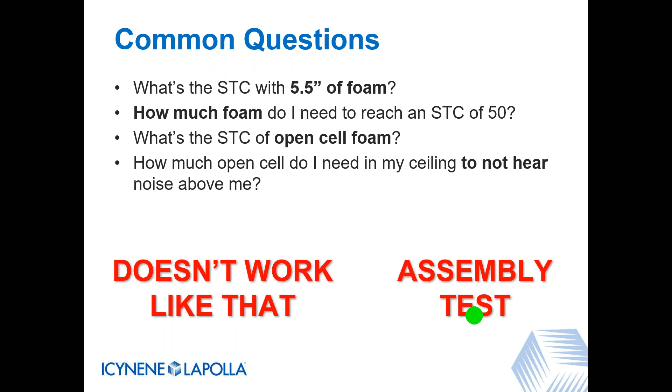It's not that easy. STC is an assembly test. This is important to remember. It is not a physical property that can be calculated and tested on just a material and then understand how it works in an application. You can get material values, but it has nothing to do with the end result of the application. So it's important that we all understand that STC is an assembly test and that it's not as simple as saying how much foam do I need to reach an STC of a certain value, or what's the STC if I have 5.5 inches of foam? It's just not that simple.

We're going to cover why that is and help us have a better understanding of how to have these conversations with people who may be asking you these questions.

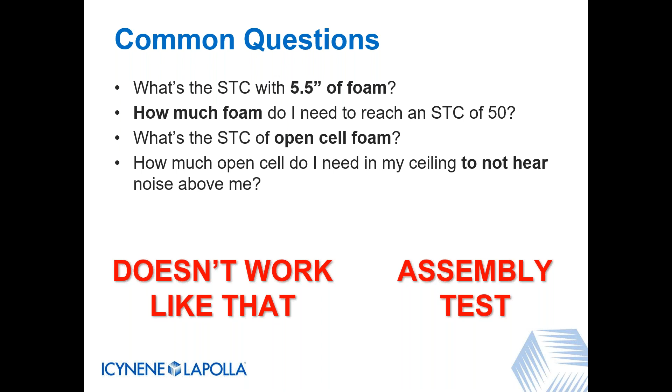So some of the originating factors that might be causing some of those questions are information that's put out there on different data sheets. These particular two clips from data sheets are Icynene Lapolla data sheets, but I think you'll see this exact same type of information on a whole bunch of different manufacturers' data sheets. And what it leads you to believe is that the sound transmission class of 41 is specific to the foam that is on this data sheet, or that the noise reduction coefficient of 0.7 is specific to the foam that's on this data sheet.

But the reality is that they're assembly related, and a lot of data sheets don't necessarily help explain what exactly that assembly is. And it's important to know that if you change a component of that assembly, then you're going to change the result. If an assembly was tested with 5/8 inch gypsum board and someone wants to build with interior 1/2 inch gypsum board, then you will get a different result.

So it's important to know and how to explain to someone that it's not a material-based STC result, that this was achieved with this foam in an assembly, not just the foam is causing the STC. This particular data sheet here attempts to at least show that there is a 2x4 wood stud wall involved in the assembly, but it doesn't tell all the details. It doesn't tell what sheathing was used and how much foam was used. It just simply says STC 37.

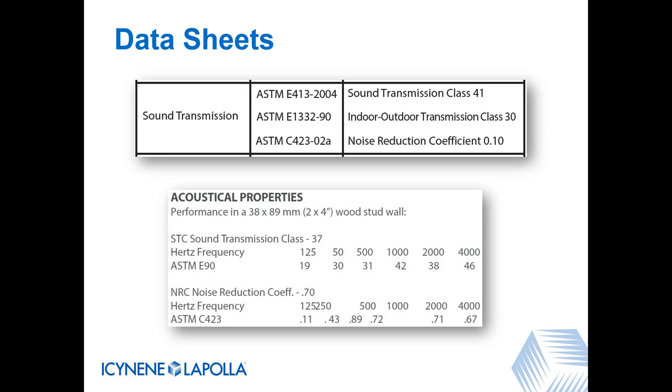So understanding that we do have information, but it's really too difficult to list all of the information. Every detail of every assembly is too difficult to list on a data sheet. So we want to inform people that we do have something, but we just can't list everything on a data sheet. It gets too complicated.

Let's make sure we understand a little bit about how the STC testing works. So STC, Sound Transmission Class, that's what it stands for. You may see a listing that says an STC of 37 class. Sometimes they repeat the word class. It simply is just referring to STC.

It's an integer rating of how well an assembly attenuates airborne sound. An assembly, you need to make sure you remember that. This is important. An STC of 35 does not mean it stops 35 decibels of sound. So in this example here, we've got a room that's creating 100 decibels of sound, and on the other side of the wall, we're hearing 55 decibels. That does not mean that this wall has an STC of 45. That's not what that means. So STC is not directly related to how much decibel sound is lessened, so make sure that's clear as well.

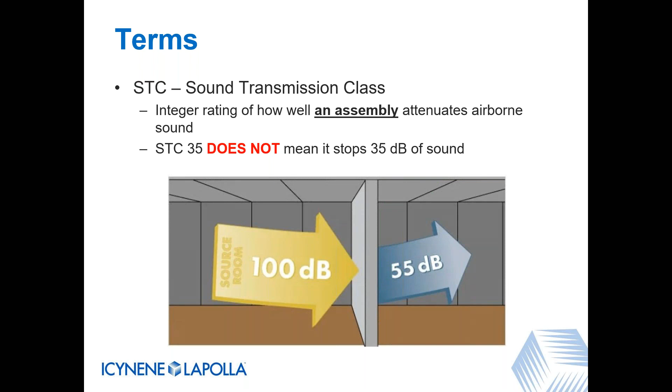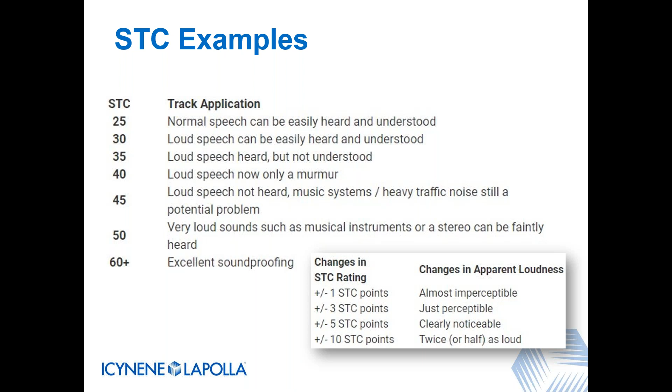So the difference between 40 and 50 is a big difference in STC. But if you have a rating that requires a jurisdiction's 45, and you have an assembly that has a 43, that's only 2 STC points difference—between imperceptible and barely perceptible. So that's something we need to be able to argue when talking to people, to understand that a 1 to 3 point difference is really not making much difference in the overall sound of that assembly. It's important we remember that so we can communicate it moving forward.

Problems with STC testing—there are quite a few. Let's start with the one that benefits spray foam competitors the most. STC testing requires a laboratory airtight assembly. Remember that image I showed of the two rooms? This wall, this assembly that gets put in between the two rooms, has to be airtight because sound travels through air.

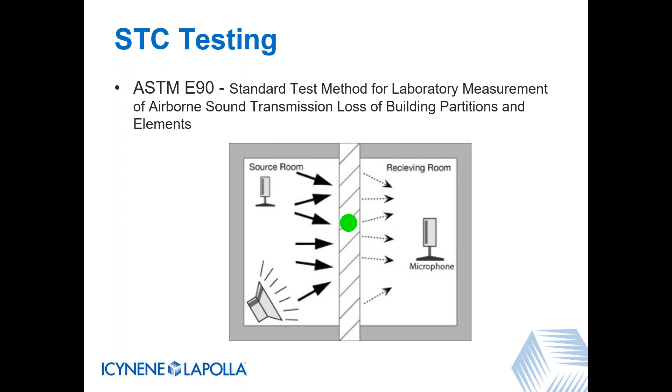If you do not have an airtight assembly, sound might bypass your assembly and get into the microphones, so you're not really testing the actual assembly itself. In a laboratory test condition, you've got a wall filled with air permeable fiberglass and sheetrock on each side, but there are no penetrations—no windows, no power outlets, no light switches, no pictures hanging. Unlike a real world scenario, you're testing a perfect wall that isn't related to the real world, where penetrations allow air to move through. So a fiberglass assembly tested in a laboratory gets the benefit of being airtight, whereas in the real world it's not. These tests are not real-world related.

Spray foam, on the other hand, is an air barrier material. So when you test an STC assembly with spray foam, whether real world or in a laboratory, you're already getting the benefit of the airtight assembly.

STC also is not a good representation of low frequencies. STC testing is from 125 hertz to 4,000 hertz. Any audiophiles out there will know that bass is less than 125 hertz. So a lot of bass in music, deep voices, will carry through an STC wall assembly much differently than higher frequencies would. So STC results are not accounting for bass.

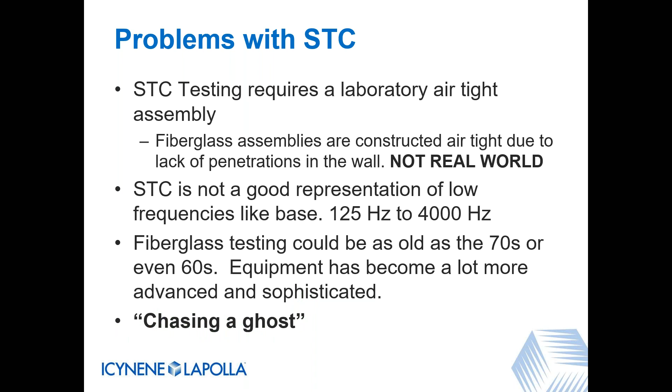Another issue with STC testing is that it was invented in the 60s, so some testing out there, some assemblies, could be as old as the 60s or 70s. Of course, equipment has become a lot more advanced and sophisticated since then, so results, if those assemblies were tested again, might not be the same. So we have to ask ourselves, are we chasing a ghost here—trying to achieve with modern materials and newer equipment results that fiberglass got the benefit of airtight materials for, from tests that could be 30 or more years old? Are we chasing a ghost trying to achieve results that really don't work in today's world? We have to keep that in mind.

So with all those issues, what is it that we should communicate?

So using 5/8" gypsum board instead of 1/2" gypsum board is a good example of this. Using a heavier gypsum board rather than your standard 1/2" gypsum board is a way to help achieve better sound attenuation. If sound attenuation is important to your job, it's worthwhile explaining that. Hey, on your exterior walls, instead of using 1/2" gypsum, use 5/8. You're automatically going to increase sound attenuation. What else can you do to increase sound attenuation?

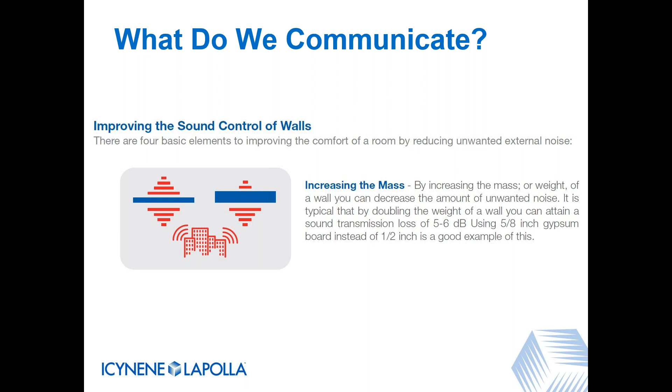You can decouple the system. So here we've got a wall that is all touching itself. You've got wood studs, you've got insulation, you've got interior and exterior sheathing, it's all touching. The sound can vibrate right through those materials and go right through.

Decoupling, this wall has an airspace inside. You've got some insulation on one side, spray foam adhered to this wall, and then you have airspace before the sheathing of the other side of the wall. That airspace decouples the vibration movement. The vibrations move through the insulation, they hit airspace, vibrate in the air, and then not as much sound transfers through. Sound is energy. When this impacts on a wall, it sets the wall into vibration.

This vibration carries the unwanted sound through to the opposite side. So another way, rather than having airspace inside the wall, is to change the way that the sheathing is fastened in this wall assembly. If the interior sheathing is fastened with resilient channels or furring strips, that is another way to decouple the surface area contact with the studs.

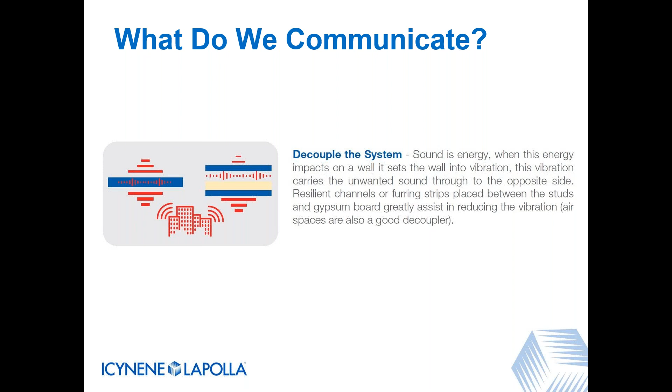Again, if you have our first example with increasing gypsum from 1/2" to 5/8", and a second example of using an airspace in the assembly or a resilient channel or furring strips, you've already dramatically increased the STC of this wall just by doing that all by itself, those 2 things.

A third thing is using an absorptive material. So here we have an assembly with open cell spray foam inside, which absorbs the sound energy and doesn't allow very much of it to transfer through. So as you can see, you've got noise on the outside of the wall. As it's moving through the absorptive materials, you've got less on the inside wall.

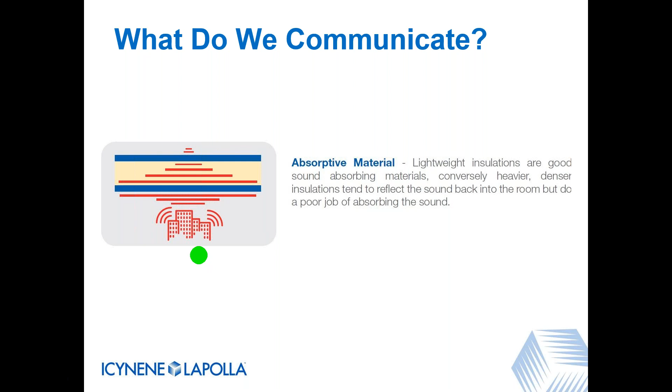So lightweight insulations are good sound absorbing materials, and conversely, heavier, denser insulations tend to reflect the sound back. So lightweight can be considered open cell, heavier, denser can be considered closed cell. So closed cell would help reflect this outside noise back to the outside, while open cell absorbs it and prevents it from moving through.

Fourth way is air sealing the wall. Like I mentioned earlier, sound moves through air. If we can air seal an assembly, like using spray foam, then we can prevent sound from moving through the wall. In real world, fiberglass batt insulations, even cellulose blown-in insulations, will settle over time, and there will be airspace, air pockets that allow sound to move through. You can see that while fiberglass does reduce the sound, an air barrier system would reduce it even more.

So something we need to be pointing out, of course, we are advocating for spray foam. Therefore, we want a nice air-sealed wall for many reasons, sound being one of them.

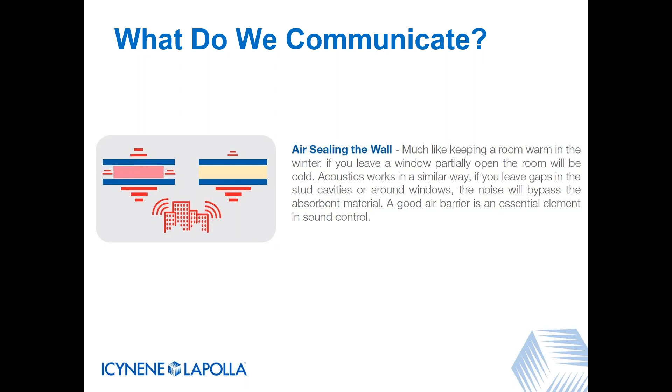Again, in this document, it also points out that in the real world, walls are far from perfect. Walls can have numerous acoustical flaws in them. Items such as electrical wiring, switch boxes, outlets, piping, all make sound control more difficult. Beyond providing a sound absorption material, Icynene Lapolla open cell spray foams fill a wall in ways that fibrous batts cannot, adhering to the substrate, wall framing and sheathing, limiting the ability of sound to bypass the insulation.

Noise, like water and temperature, will move through gaps. Icynene Lapolla open cell spray foam works as an air sealing element as well as an acoustical insulation, limiting the effect of real world acoustical flaws. So again, this paragraph is kind of encompassing everything that we've just talked about: the issues with STC testing, the fact that fiberglass is getting a benefit of the test method, and the fact that real world has many, many variables involved.

So final summary here of what do we communicate: open cell foam shows similar, if not better, performance than fiberglass.

Icynene Lapolla open cell foams vary in density, so there could be 3/4 pound to 1/2 pound, but we find that they have very similar performance. The 3/4 pound foam that we're getting ready to show you was tested at 2 inches, because that is an air barrier at a minimum 2 inches. So if you're using foam for air purposes, for sound purposes, the 3/4 pound product can be used at a minimum of 2 inches to achieve that sound air barrier result.

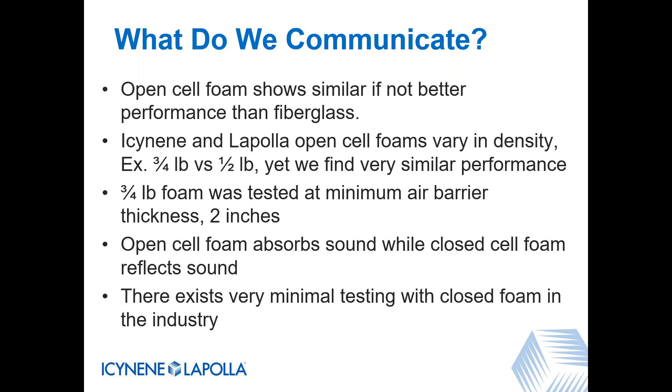Remember, STC is assembly based, so if you were to change something in these assemblies, you would get a different result.

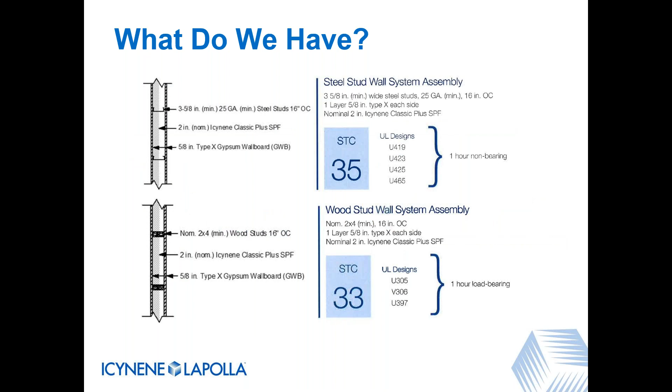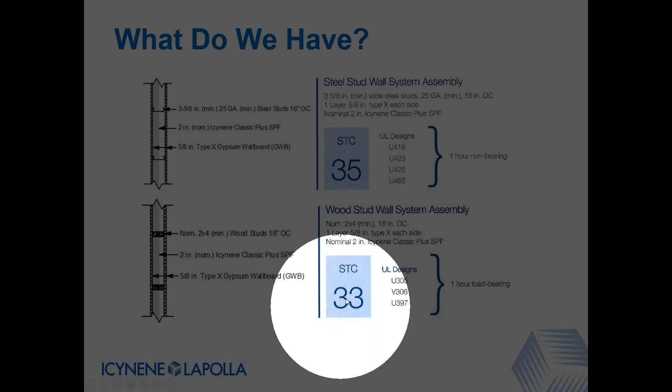Case in point, here is an assembly with steel stud with 1 layer of gyp on each side, and wood stud with 1 layer of gyp on each side. Each of these are using the 3/4 pound foam at only 2 inches. So if this is an interior partition wall trying to achieve a certain STC, you can get a 35 here and a 33 here - wood stud 33, steel stud 35 - with only 2 inches of that 3/4 pound foam. Just an example of some of the testing we have.

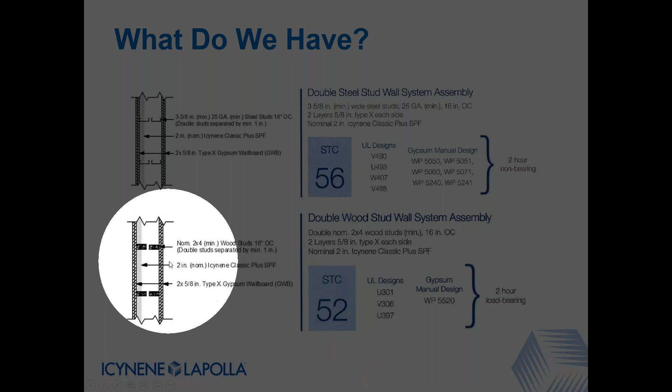Same thing with the wood stud, decoupled with 2 different sets of studs, gives 52, again with only 2 inches of that 3/4 pound product. So just several examples of what the testing we've done with STC.

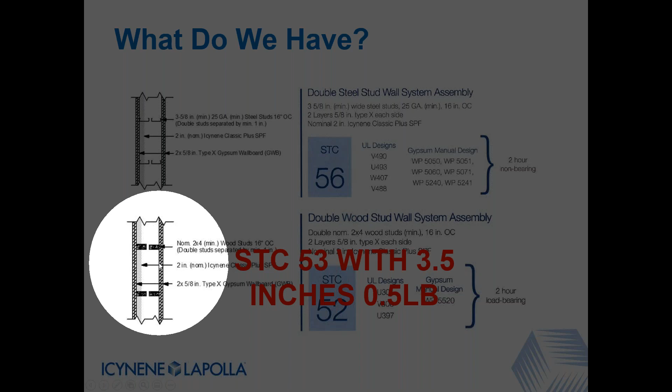We wanted to point out that we actually did a second test on this wood stud assembly where we used 1/2 pound foam at 3.5 inches, and we're able to achieve a 53 - slightly better than the 2 inches of foam. We used a normal 1/2 pound foam, 3.5 inches of foam, and got a 53. Just another example of some of the testing we have.

One thing we want to point out as we finish the STC section is that engineering evaluations are currently not available. Our company can't provide them, and similarly we have not been able to find third-party acoustical engineers willing to provide an evaluation for STC assemblies. This simply points to the fact that STC can change dramatically depending on what's in the assembly. So it's impossible to expect any manufacturer to have a test for every single assembly out there.

That's why it's important to know the different ways that STC in the real world can be affected: increasing the mass, decoupling the system, using absorptive materials, and having an airtight assembly. All four of those things we need to have on the forefront of our mind when we're discussing STC with anyone out in the field.

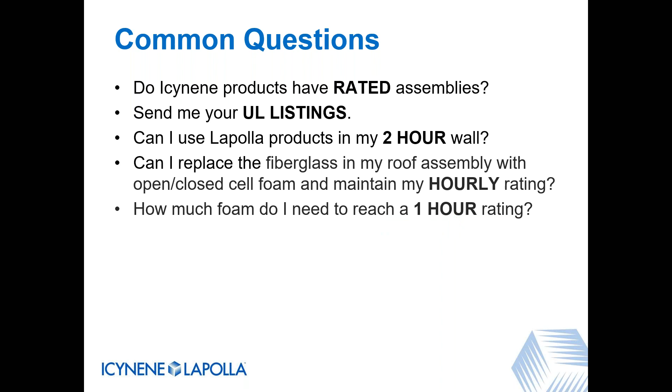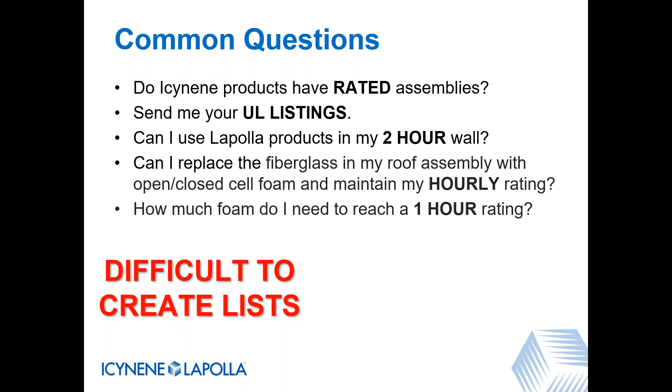This one's more common than I'm happy to see, because it's unfortunate. Similarly to the questions related to STC, it's difficult to create lists. A lot of people just want a list of all of our UL listings, but it's very difficult to come up with that list, and we'll talk about why that is.

It's important to know that foam is along for the ride, particularly related to this last question. Spray foam insulation, in fact foam plastic insulation in general—rigid board foam, XPS, EPS, polyisos, and spray polyurethane foams, open or closed cell—do not create hour ratings. They do not create time ratings. They are combustible. They are along for the ride.

All those products are relying on other materials to create the hour rating. It's important that we can convey that simple message, because someone may be thinking, hey, I need an hour rating in my ceiling, how much closed cell foam do I need to create an hour rating? We need to stop them right there and say, look, no spray foam product, no foam plastic insulation product is going to create your time-rated assembly. You have to rely on other materials for that.

Same thing with UL listings, we'll get to that in a second. But just like we did with STC, let's look at what we see on the data sheets that might help us understand a source for these questions. We state in multiple manufacturer data sheets, not just Icynene and Lapolla—our industry states that there is compliance with 1 and 2 hour ratings.

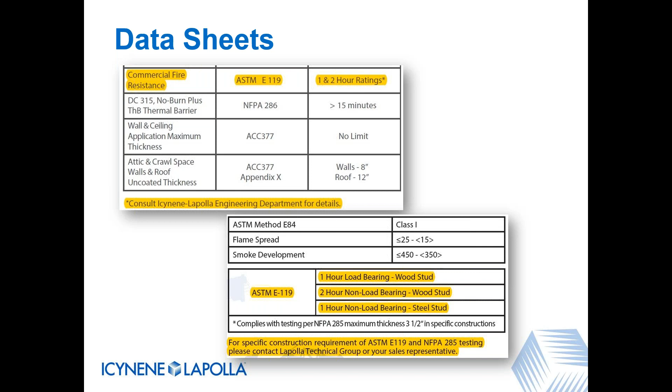We state that we've got 1 hour wood stud assemblies and 1 hour steel stud assemblies. But in both of these data sheets, you will note that we say consult the engineering department, consult the technical group. That's because it's just not as simple as saying, yes, we have it. It's an assembly-based test, just like STC, and it depends on the assembly, and it depends on the product and where the product's going and how much we're using.

So knowing that, before we get into what we have, let's make sure we understand what these hour-rated assemblies are. It's ASTM E119. That's the very common term for time-rated, hour-rated assemblies. The standard test method for fire tests of building construction and materials. It's an assembly test—we got to remember that.

And here's what it applies to: there's a floor ceiling test or assembly, there's a roof ceiling assembly, you can actually have time-rated assemblies related to beams and columns, and then you can have walls and partitions. Walls is intended to mean exterior walls, partitions is intended to mean interior walls. So all of these different assemblies can be time-rated for 1, 2, 3, 4 hours, whatever the particular application requires.

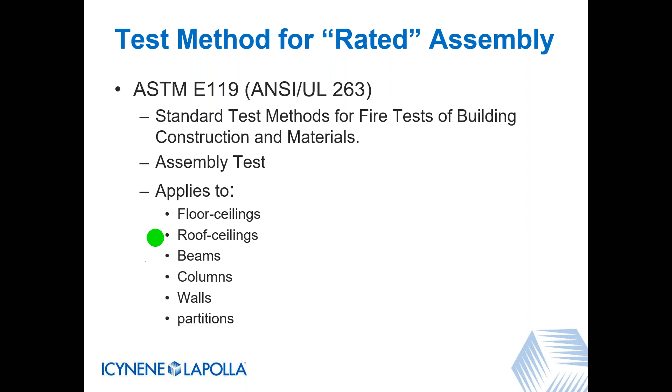So we need to make sure when we're talking with someone that we understand what assembly are you even referring to when you ask us if we have any time-rated assemblies. Which type are you referring to? We need to make sure we know—we need to ask that question.

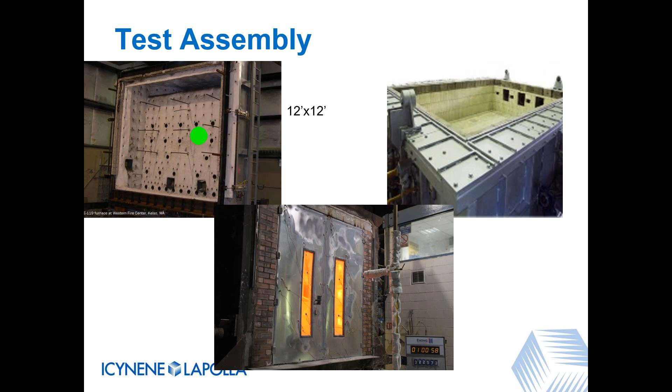How the testing works: there is a permanent structure like this or like this. This one's for walls, this one's for ceiling, roof type applications. This one's horizontal, this one's vertical. There are thermocouples inside. Fire is produced at these different locations, at the squares, just like these squares. Your assembly is built and then pushed up to this wall or laid down on top of this horizontal assembly, and then the fire occurs. That's how the test occurs, that's how it's actually tested. You have a permanent structure, the fire is created inside, and your assembly is pushed up to it.

Now, during that fire, it's a temperature curve that is created in that assembly. If you have an hour-rated assembly, you're going to go up this temperature curve for an hour. So between 30 and 60 minutes, you're going from 1550 degrees to 1700 degrees. That gets pretty dang hot.

A couple interesting points. It's not just the fire and the assembly maintaining its composure during that fire. The unexposed side has to remain below 250 degrees Fahrenheit. And once the time rating is up, there's actually a second portion of the test where the assembly undergoes a fire hose water spray.

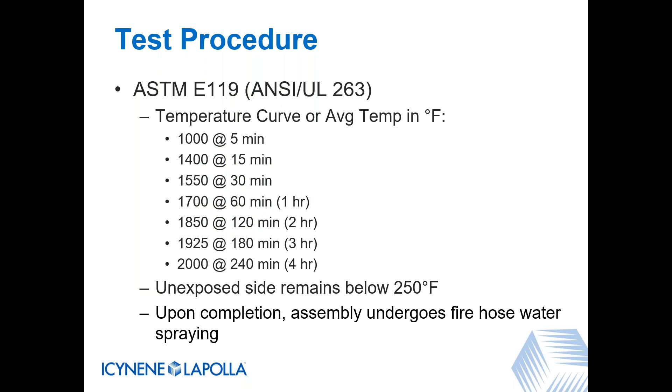It has to remain in place during that fire hose water spray. So the whole point of this is to let you know that sometimes it may be thought of, hey, you don't have a particular assembly, why don't you just go do the test real quick? There's a lot that goes into these tests. The fact that the other side has to remain below 250, and you still have the hose spray beyond this extreme heat. There's a lot that goes into them. So it's important to know that it's not a simple test.

One thing that I want to make sure to point out, metal transmits heat. So when you have metal on the fire side of an assembly, that's going to transmit heat right through. A lot of times I get asked the question,

for example, metal buildings. Those cheaply constructed metal buildings, they might be close to another structure and they might need a time-rated wall. We're not aware of metal assemblies that are meeting these requirements without a bunch of non-combustible materials inside of that assembly. So remember, spray foam is not non-combustible. Spray foam is combustible. So if you've got an assembly that's using a lot of metal sheeting on either side, it's probably going to be very difficult for spray foam to be inside of that assembly and maintain an hour rating. So just want to point that out there.

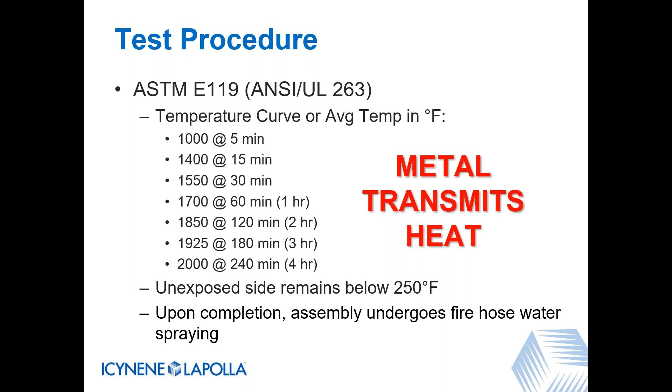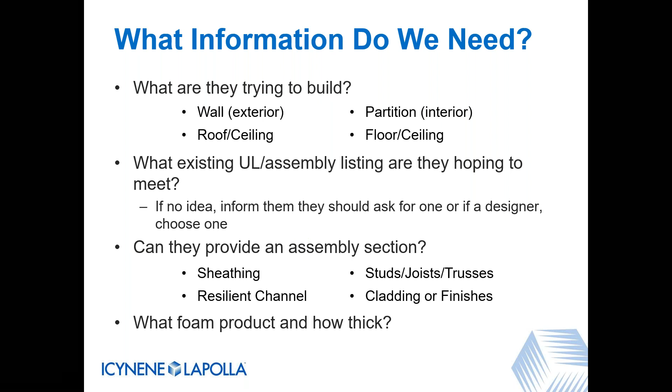And of course, this is a huge headache when people don't even tell us what foam product they want to use. It's extremely important. We got to know, we're selling foam here, we're advocating for foam. Which foam are we wanting to use in this assembly? Let's make sure we, at a minimum, identify that. But the rest of this is important. If we can know this information, then we can have a much easier time determining if our spray foam can be inside of that assembly.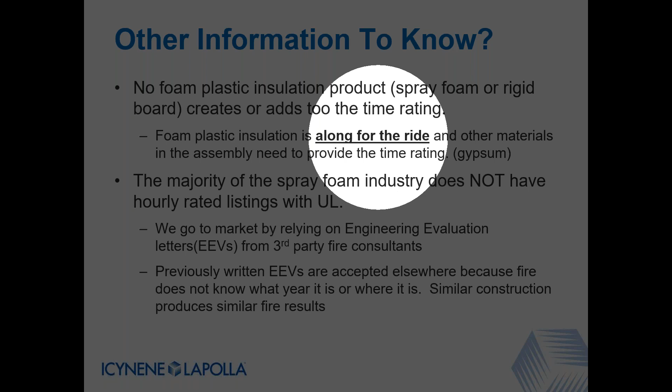Just some other information to know - I've mentioned this before, but I'll repeat it. No foam plastic insulation product, whether spray foam or rigid board, creates or adds to the time rating. It's along for the ride. It's important to know, and we need to communicate to people that the other materials in the wall need to create the rating.

We also need to know that the majority of the spray foam industry does not have hourly rated listings with UL - the vast majority. There are only very few UL listings that even include spray foam. The entire spray foam industry goes to market relying on engineering evaluation letters, otherwise known as EEVs, from third-party fire consultants, most commonly Priest & Associates or Hughes & Associates.

So we rely on third-party evaluation letters. We take those UL listings that they're trying to meet, and the fire consultants determine if we can put the spray foam in that assembly without detracting from the existing rating, because the existing design is intended to create the rating. Maybe they had fiberglass batts in the original UL listing design, and these third-party fire consultants will determine if you can put spray foam in there and maintain the rating.

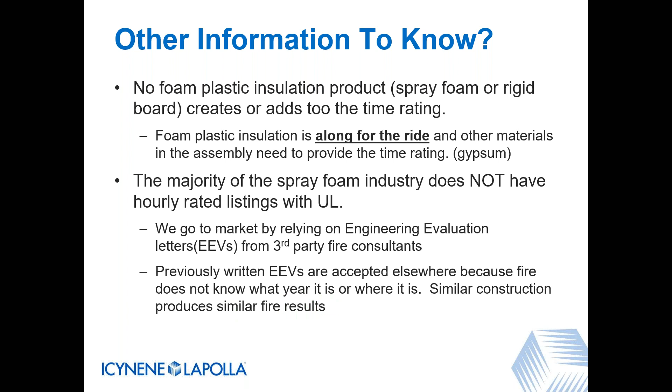It's also important to know that previously written EEVs are accepted elsewhere, because fire does not know what year it is or where it is. It doesn't know if it's residential or commercial construction, or if it's 2000 or 2020. If the assembly is built the same, the judgment remains - same products, same assembly, same judgment. So previously written EEVs are accepted by building officials all over the country. Similar construction produces similar results, so we don't have to get a brand new evaluation for every instance.

From engineering evaluation letters, as an example, Icynene and Lapolla have approvals for a very common wood frame assembly. This is just some of the approvals we have - we have a bunch of them. I'll just go over several that are very popular, starting with the U356 wood frame construction.

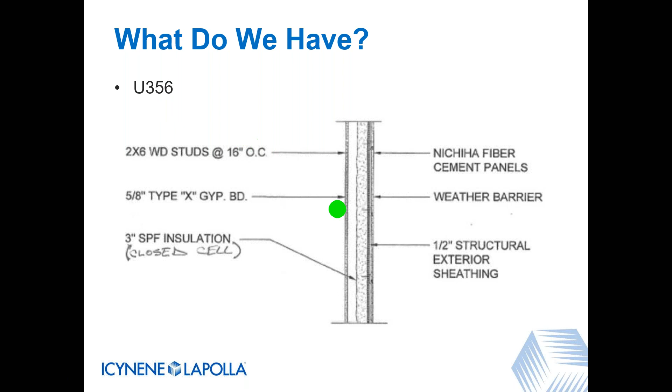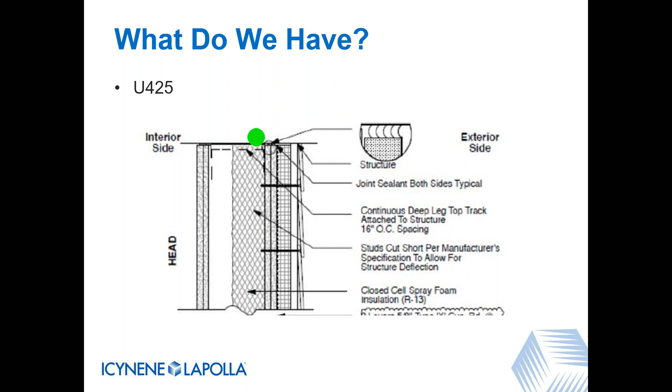We've also got the U425 steel stud construction, which looks like this with multiple layers of gypsum. This is a 2-hour rated wall, and it even uses exterior insulation on the outside.

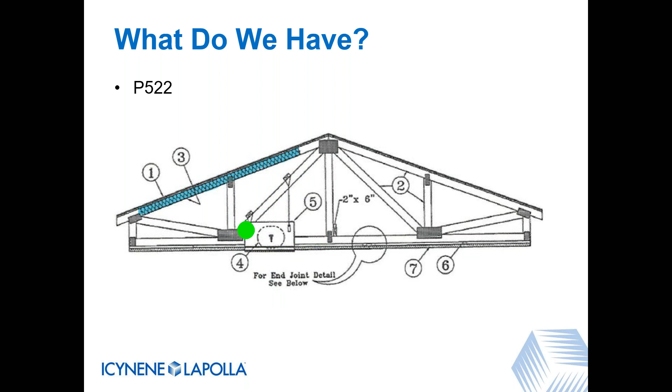Another popular one is the P522. This is very popular in commercial construction made out of wood frame, like apartment complexes, assisted living centers, and nursing homes. This is a very popular one where we can put the insulation underneath the roof deck, create an unvented attic, and maintain the hour-rated roof ceiling application. So this one's very popular.

We've also led the way, the industry - Icynene and Lapolla has - in doing testing for a shaft wall. For those not familiar, a shaft wall is a kind of area separation wall made with two layers of 1-inch thick gypsum in the middle. This is most commonly used in townhomes or condos to separate one unit from the other.

Now, what's unique about this is that this testing has given us many different approvals for many different UL listings. However, we are not listed in UL - so we have the engineering evaluation that shows that all of these listings are now approved.

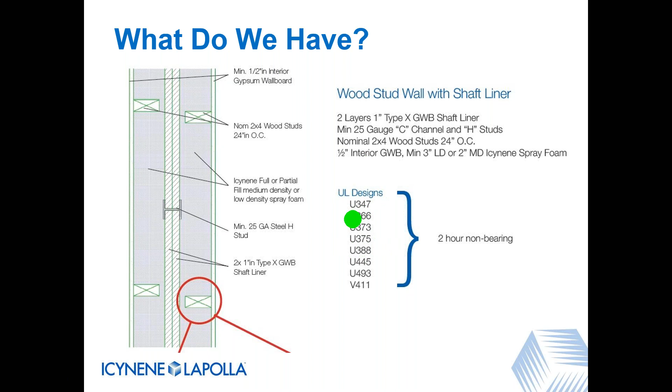What's unique about this assembly - let me make sure I make this clear - is that this circle down here is exploded into two different sections. We're looking at a fiberglass version here and a spray foam version here. The difference is the requirement for this assembly: the fiberglass requires a 3/4 inch airspace, it does not touch the shaft liner, but our testing allows the foam to be sprayed in and around this stud...

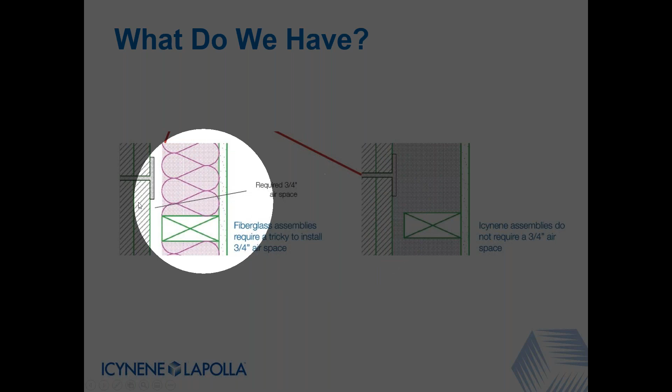...and directly onto the shaft liner, which makes application extremely easy. You install the shaft liner first, and whenever installation is taking place, you just come in and spray the foam as necessary. That 3/4 inch air gap is not required, so that's a big difference - it makes it a lot easier to install. When you incorporate that with STC practices, you now have a much better airtight assembly between units.

Again, leading the way, we've got testing with Intertek, so we've got hourly rated assemblies listed on Intertek's website. These are assemblies that you wouldn't have to use a third-party fire consultant for.

So what I want to do now is go to the questions, and make sure people have an opportunity to ask these questions. We've got several here, so let me read through these.

Someone's asking if there's a recorded version that they can watch later. Yes, there is. That will be sent out with the follow-up email whenever that email comes from our marketing department. Let's see, got another question here.

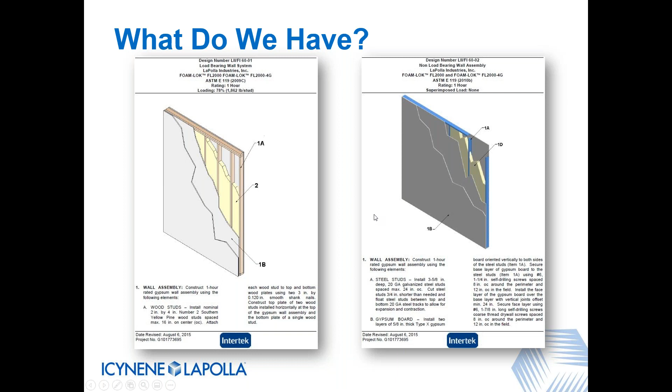Here's a question. Often we are replacing fiberglass with spray foam. So if you're replacing an R19 fiberglass, is it safe to say that an R19 open cell would have similar STC as fiberglass in the same assembly? In other words, you're not changing anything, but you're just going through and changing the fiberglass to open cell. The question is asked correctly - is it safe to say? And the answer that we have is yes.

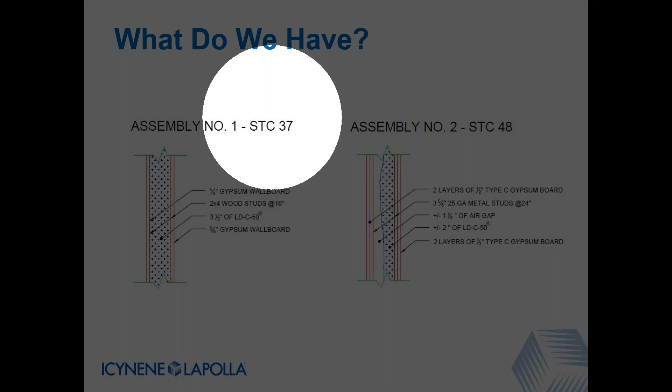When you look at the testing that we do have, whether it be our older testing or our newer testing, these results are very similar to what fiberglass produces. These results in particular, when you're looking at a full stud fill, we've got 3.5 inch, so for example this is an R13. If you were to have an R13 batt, many of the UL listed STC results for fiberglass is going to be right around this exact same number. Remember that plus or minus 1 or 2 STC points is not going to be noticeable. That's something we need to be able to communicate. If someone's saying, yeah, but they got a 38 and you're a 37, it's not noticeable. We need to make sure we can make that clear.

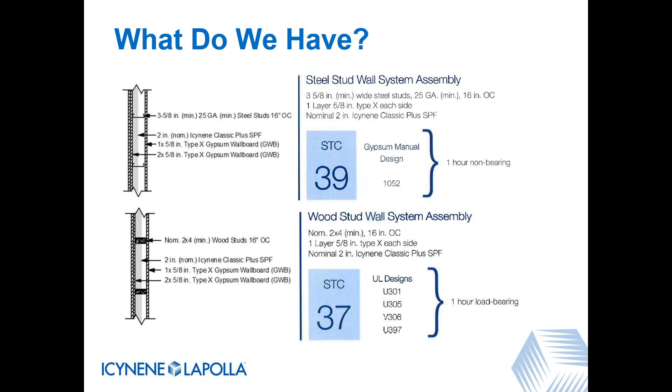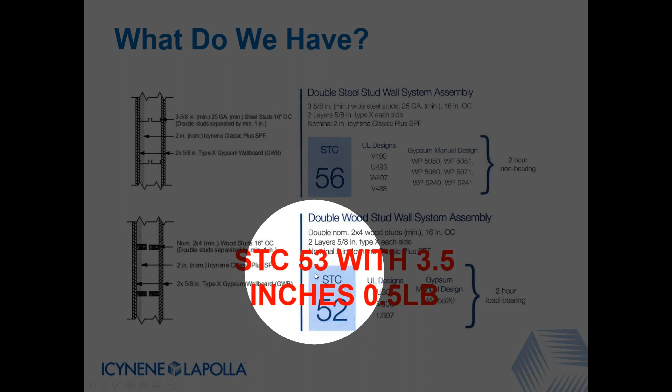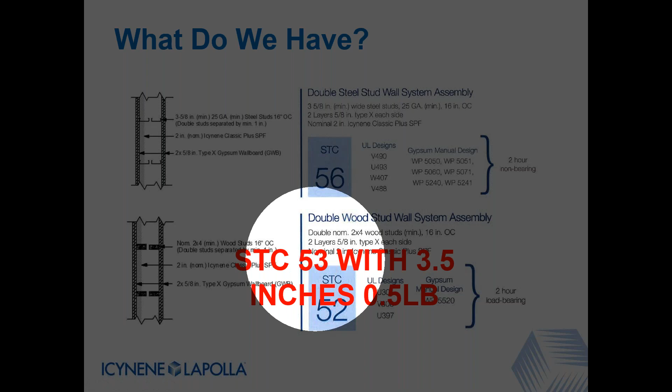So in general, the answer is yes. We see that our open cell product is producing very similar results, sometimes with less open cell. For example, I'll make sure to point that out - this testing here, where we did 3.5 inches in a double stud wall and achieved a 53. It's important to note fiberglass uses 3.5 inches on both sides of the wall and achieves a 54. So here we are with 3.5 inches of half pound on one side of the wall only and achieving a 53. In many ways, we like to say it's equal to or better than fiberglass. It's all going to be situation dependent though.

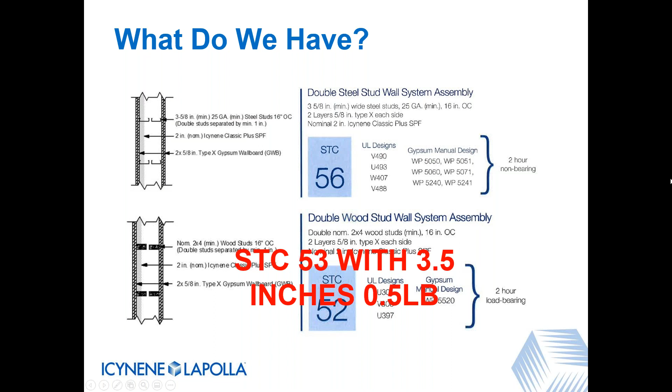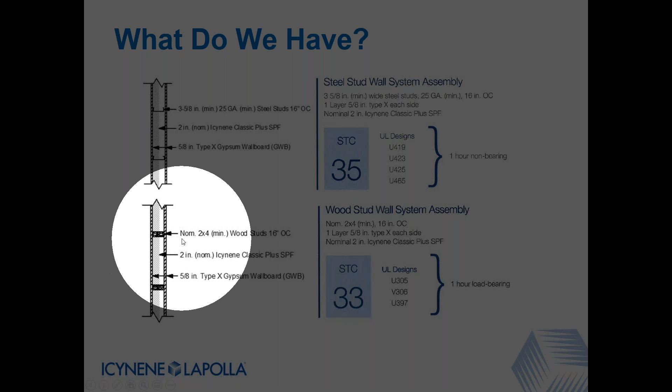Another question - do we have an STC for a 2x4 wood stud 16 inch on center? Yes, that question is yes, we've got that here as an example. This is 2x4, we've got several different ones of these. Here's a 2x4 with 2 inches of 3/4 pound at a 33, and here's a 2x4 with 3.5 inches of half pound at a 37. So the answer is yes, we do have that.

So the question is, does Icynene and Lapolla have the same time rated listed assemblies? The answer to that question is no, currently they don't have the exact same. However, it can be - throughout the history, part of the time rated way we go to market is through EEVs. Icynene has had more EEVs created. So while it is possible for Lapolla products to achieve the same results, they just don't have as many EEVs created yet with their name.

So when these situations come up and time-rated assemblies are necessary with Lapolla products, we can look at what it would take to have these EEVs essentially duplicated with the name of Lapolla products. It's not going to be free, but it can be achieved. So the answer to the question is yes and no. It's mostly based on the fact that the Icynene brand has been having these EEVs for time-rated assemblies created for just a lot longer.

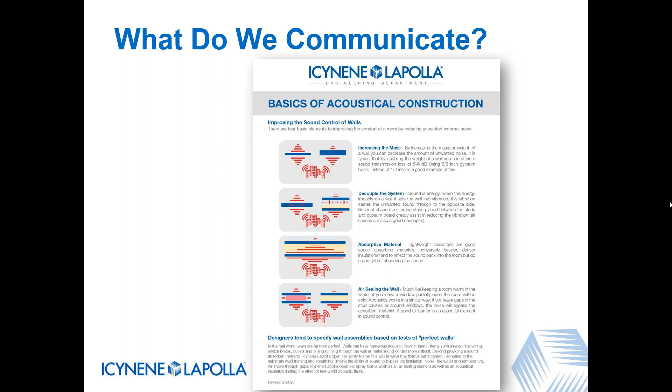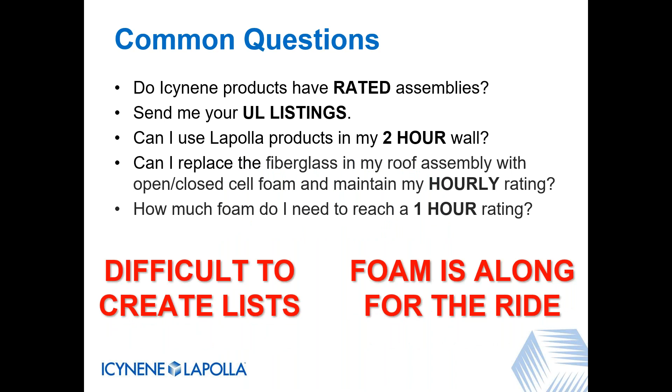And again, just like we try to market in every home, time is also a saver. If spray foam can go in faster, then that is a money saver compared to fiberglass, because this may be difficult and time consuming to install.